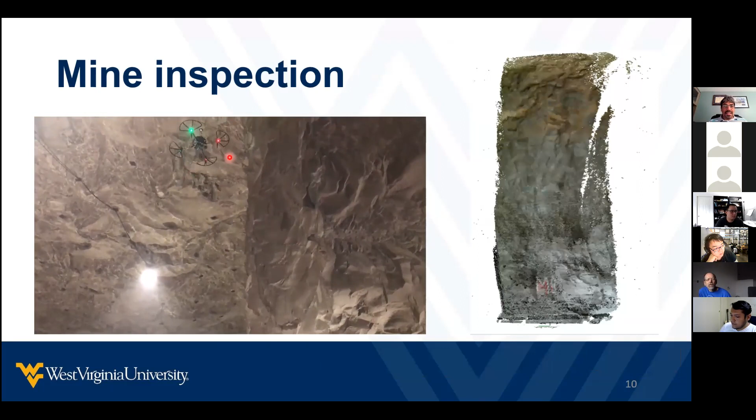My part of this project is the drone part, so we'll talk a bit about that. This is what we need to do, this is the pillar we have inside the mine. I hope you can see a video with the drone here. We are creating a map using LiDAR, and this kind of map is what we've gotten so far.

The idea is that we'll get these maps frequently, say once a year, and compare them to see if there are any problems with the pillars. That's the goal. The environment is indoor, so we cannot use GPS. We need to work on SLAM or other localization approaches for the drone. I'll show you some of the problems we'll have with this.

There is a question in the chat. Yeah, go ahead.

Typically I see LiDARs that are pretty large, too large to fit on a drone. So what LiDAR are you using? We are using an L515 LiDAR from Intel RealSense. It's a solid state LiDAR, very small, so it fits on the drone. The field of view is also small, so we need to move a lot to get a good map, but it is very light. That's the one we're using.

I see, sorry to interrupt. No problem, if you have questions just interrupt.

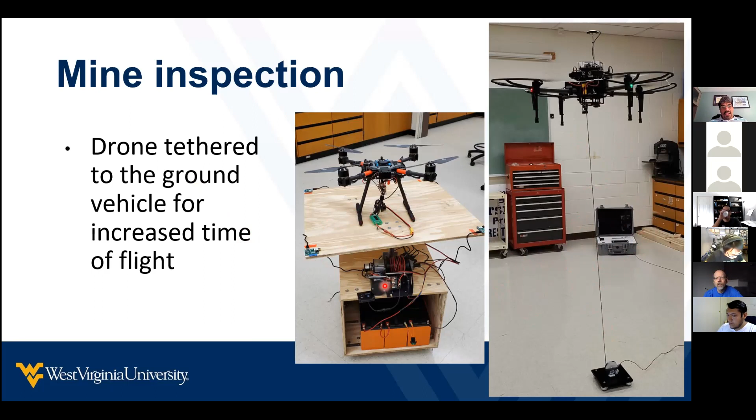Tethers are nice for powering, but tethers also present some problems. This is something you can see. If you don't take care of the tether, if you don't plan correctly the motion of a robot, you're going to have tangling. This video we just did with a ground robot shows this problem.

This robot is exploring the environment. You see it's creating a map here while it moves, and it's ignoring the tether. If you do that - this is Danilo, my student, helping the robot right now, because if you ignore the tether, simply you're going to have tangling. It's a problem. Although you have a map, at the end, the cable is wrapped around every obstacle.

So a solution that Danilo proposed - I have a picture of Danilo here - is to do motion planning, mapping, and exploration while being aware of the tether. If you do that, you can avoid tangling. In this video, he shows it's possible to do the same task without tangling around obstacles.

I'm going to just show how he does that. It's kind of simple, but you need to worry about it. Basically what he does is he keeps track of the tether configuration. So in a situation like this, for example, this is a robot, and they have an obstacle right here. He has an estimate of the tether.

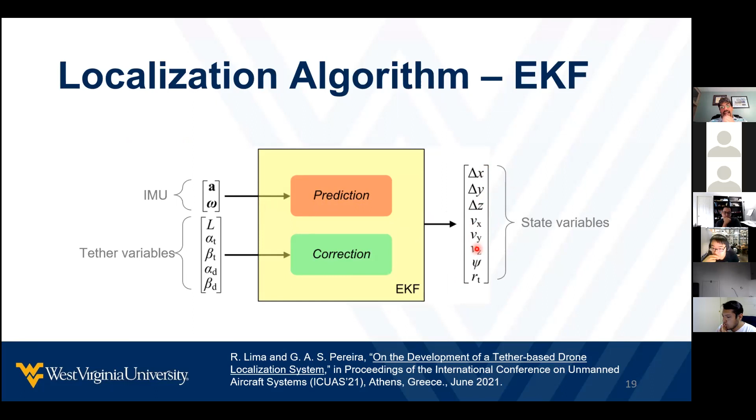So using EKF, for example, it's non-linear, so the measurement is non-linear, so I need an extended Kalman filter, and then we can estimate the position and the velocity of the drone. For us, it's very important to estimate the velocity as well, because we're gonna do landing on the platform using this kind of system.

This is a simulation. This was presented, it will be presented next week on ICUAS by my student, Rogério. And it's possible, right? We didn't test that yet in the real drone because the drone is not flying. We can localize the drone with not so bad error. We are planning to test that at the end of the summer.

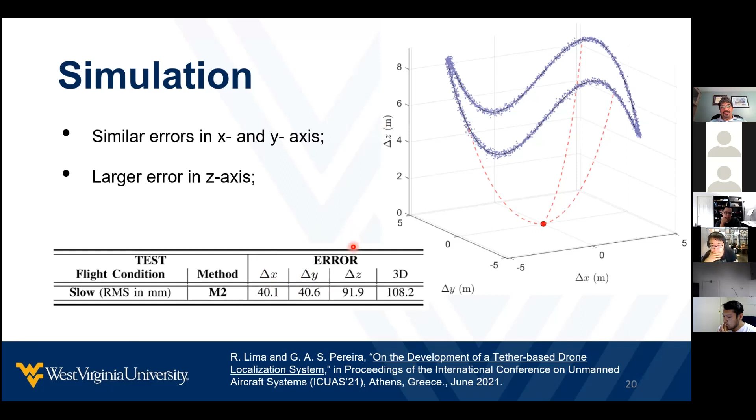Another thing we need to do, because remember that we have this ground vehicle and we have this drone that needs to land on the ground vehicle to move. So basically the ground vehicle, we're gonna carry the drone around, right? So we also develop some landing strategies.

So one of the landing strategies I'm showing in this video was proposed by Vinicius. Vinicius is my former student in Brazil. Now he's a fellow faculty over there as well.

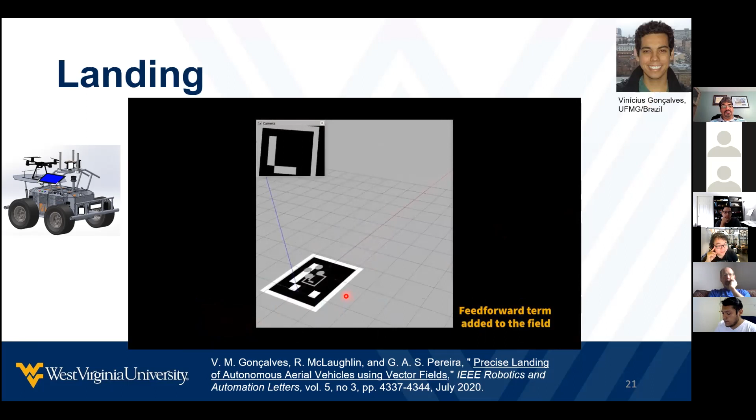We defined this method based on vector field to land, right? Right now in these videos, you're using vision to land, but the idea on the robot is that you're gonna have the tether for localization.

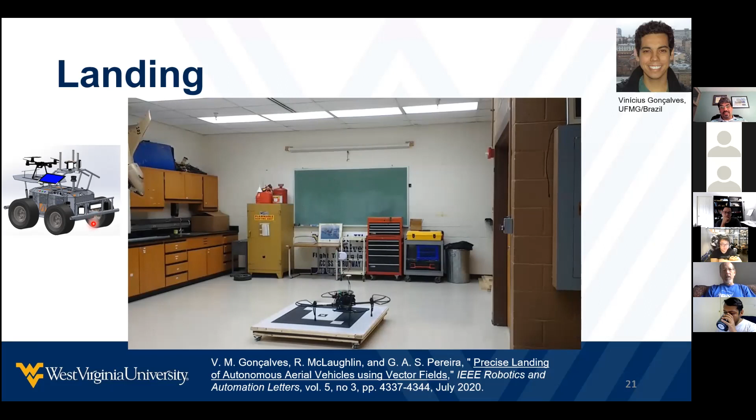We're also equipping the drone with UWB sensors. So if the tether doesn't work very well, we're gonna have a sensor fusion with UWB sensors, range sensors to avoid. But this is something that we did last year for that. So in this case, we have this camera, and the drone is detecting the marks using vision.

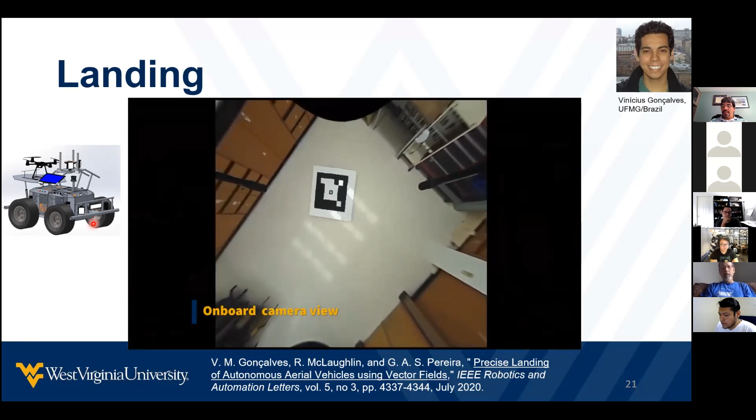Yeah, I think I'm gonna move a little bit faster here.

How it works, basically, we define the shape of the trajectory we want the drone to land, and then we define a vector field that converges the drone to this shape. We compare that with visual servoing.

Another question, let me respond. The tether is strong enough, perhaps it could guide the drone. Yes, we are planning to do that. We're also using the tether for keeping the drone on the ground vehicle while the assembly is moving, because the terrain in the mine is not very flat. So we need to keep the drone in place, and the tether can help. We are planning to use the tether to help the drone land.

So we define these vector fields. The good thing about the vector field approach is that independent of where you start, you're going to reach the goal. So basically, you're going to land.

We compared that with visual servoing and trajectory following. Visual servoing is very nice, but you cannot define the trajectory. It's very important for us to define the trajectory, because if you look at our robot, we have some obstacles on it, like lidars and other sensors. We need to avoid these, so we need to define a trajectory that avoids them.

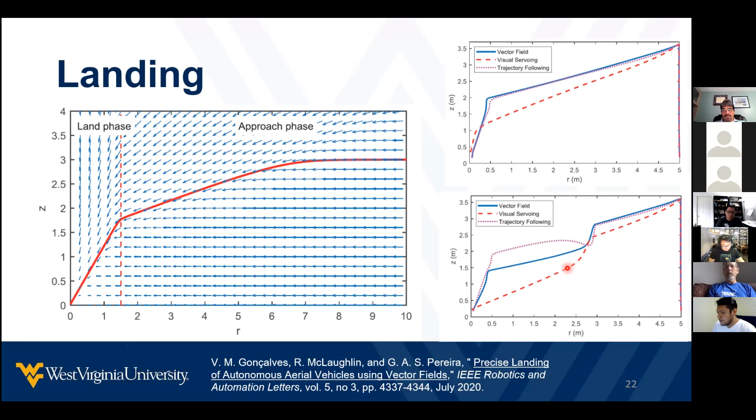Okay, next step for this project. We are currently developing a new drone. The drone we're using for the experiments is the M100 from DJI, but we cannot buy more, this drone is out of the market now, so we cannot buy another one. So I'm developing another one.

We're also planning to have a completely tethered, powered drone, so we don't have batteries on the drone. This way we can save some weight and put more sensors, for example.

We need to integrate localization and landing, and integrate this with the ground robot, then test a lot. The idea is to have a completely autonomous two-vehicle system, ground robot and drone working together, mapping the mine. This project finishes at the end of next year, so I think we have time to do all this.

Okay, the second thing I'm going to talk about is forestry. West Virginia has 81% of its territory covered by trees, so a lot of people work with trees. One problem we have is pest invasion.

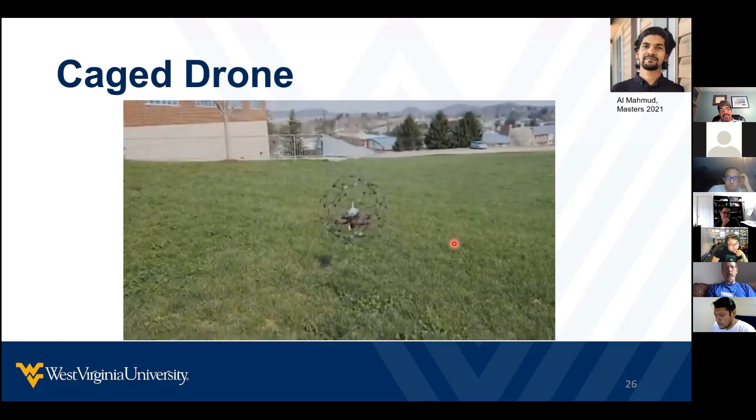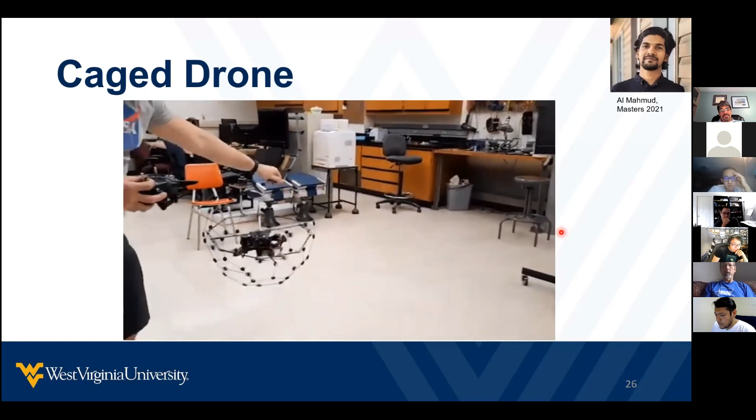Lots of collisions. So one thing my student Al Mahmud did, he just defended his thesis, was to create some caged drones. This is a drone that has a 3D gimbal inside, so you have a cage that can rotate around the drone. This is supposed to be resilient to collisions, so you can fly and, for example, collide, touch it, right? We have some commercial drones that do the same, but that was his master project to try to make something simpler and cheaper.

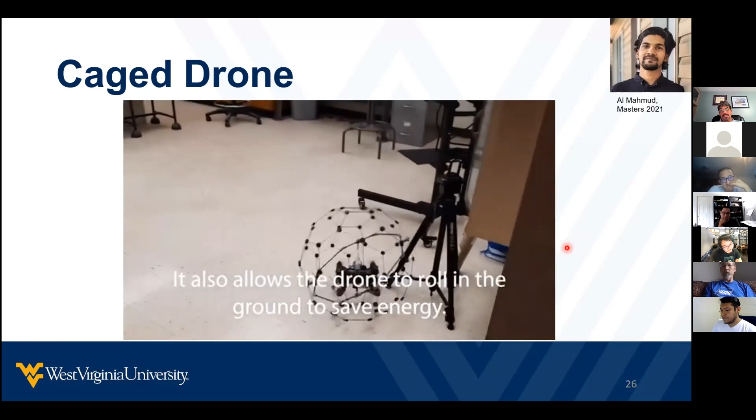So the cage is very nice. The drone can work as a ball, can rotate on the ground, and now we're trying to explore that stuff. The idea is I'm going to fly in the forest so I can collide with everything and still fly, right? So that's something we are researching right now. The problem is that this drone is kind of very hard to make. This gimbal system, and we need to save weight because the drone needs to fly, so it cannot be heavy. It's kind of very, very complicated.

So we propose some different cages. I don't know why it's not running, should be a video. Okay, let me play here. It's not playing, cannot play media. I don't know why. Yeah, but that's a different kind of drone.

A cage. So this doesn't have the gimbal, so it's much simpler to create. One thing about this drone is that when it falls, it always falls in the takeoff position. So the idea is to have a shape of the cage in a way you have this behavior. The drone is falling and then it goes to the takeoff position and then it can fly again. So this would be good for forests. Even if I collide and fall, I can take off again, right? So this is something I have some students working on.

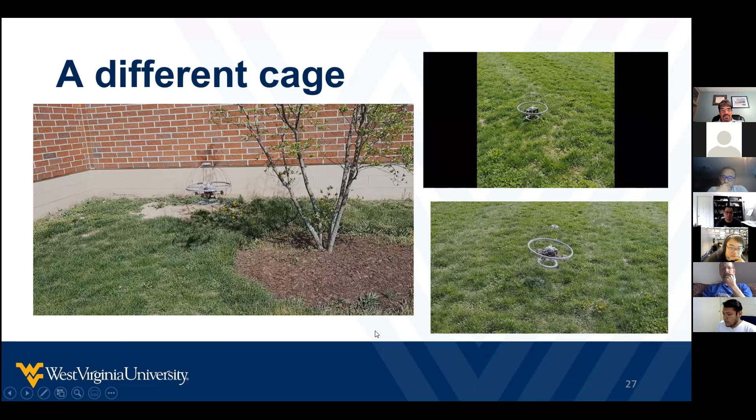So in spite of that, flying in the forest is hard. We have some problems with GPS, localization, things like that. But the big problem is that we don't have a map of the forest, so we need to avoid obstacles all the time. This is research I did in Brazil some years ago with those students, Antonio and Henrique, and we show here a drone flying and avoiding obstacles.

So basically this is carrying a LiDAR as well. This is a planar LiDAR, a Hokuyo, not as small as the Intel one, but it can detect some trees. You see it's following some trajectories here, detecting trees and avoiding them. I'm going to show you how we do this stuff.

Okay, so our solution is based on two planners. We have a global planner. The global planner, in our case, is a vector field, right? You see that we like vector fields. But what the global planner does is give the drone the main direction of movement. It doesn't know the obstacles, for example. It's impossible to know because the environment is dynamic, trees can have movement, you can have other stuff, right? We don't know the obstacles.

So the vector field is just saying the direction, okay, move in this direction, follow that curve, things like that. Then we have a second planner that we use as a local planner. This will be an optimal planner. That optimal planner has two goals: one is avoid obstacles and no-fly zones, and the other is to follow the vector field. So basically, I have a planner to follow the vector field here, but that will create paths that are free of collisions. Then this planner is going to send trajectories to a trajectory control.

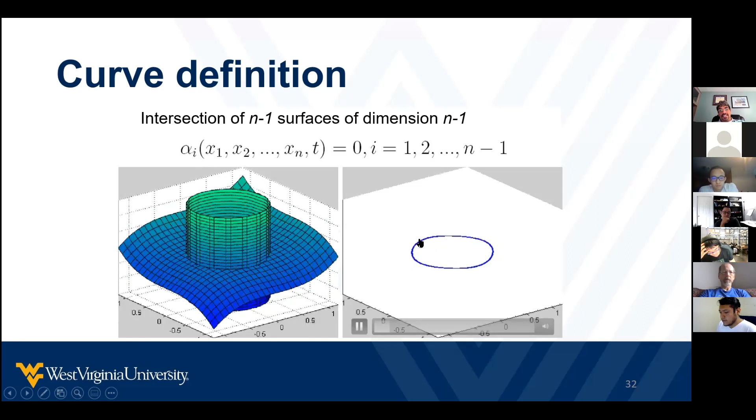So now we're going to define a vector field for this curve. Let's call each of these surfaces alpha. In this case, we have alpha 1 and alpha 2, two surfaces. In 3D, we need two surfaces, and then we define this curve here in 3D.

So the vector field is very simple. Basically, we have two components. One component solves the convergence to the curve, so we create a vector that's orthogonal to the curve. And then we have another vector field that's tangent to the curve, which creates circulation around the curve.

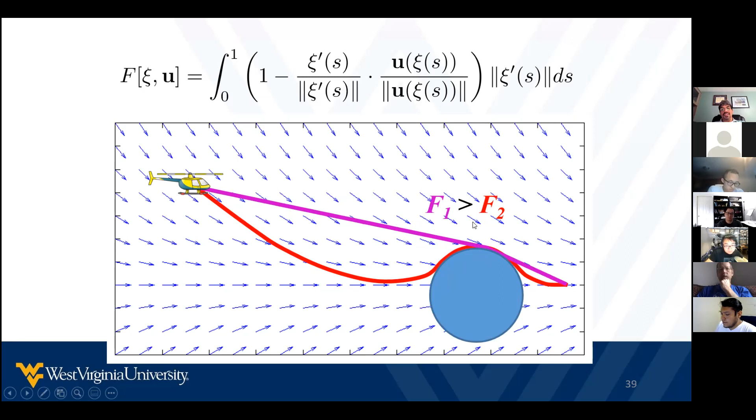So basically with this functional, we guarantee if you minimize it, the trajectory will follow the vector field. When you have obstacles, you have similar things. Here you see the pink trajectory is shorter than the red one, but the red one follows the vector field and avoids obstacles. Both avoid obstacles, of course, because in motion planning the goal is to avoid obstacles.

So how do we solve this optimization problem? We solve using RRT star. RRT star is an asymptotically optimal motion planner, so basically it finds the optimal trajectory given a functional, and in that case we're using that functional.

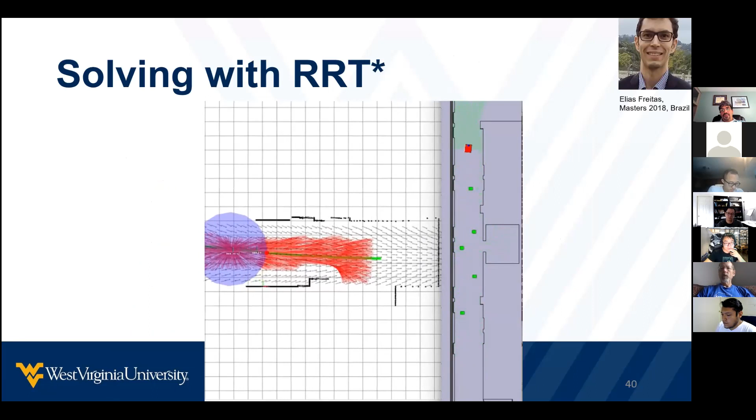So you see here a robot following a corridor and avoiding obstacles. This is work of my former master student in Brazil, Elias. And we also use that for the drone, so basically you're solving RRT star on the drone as well.

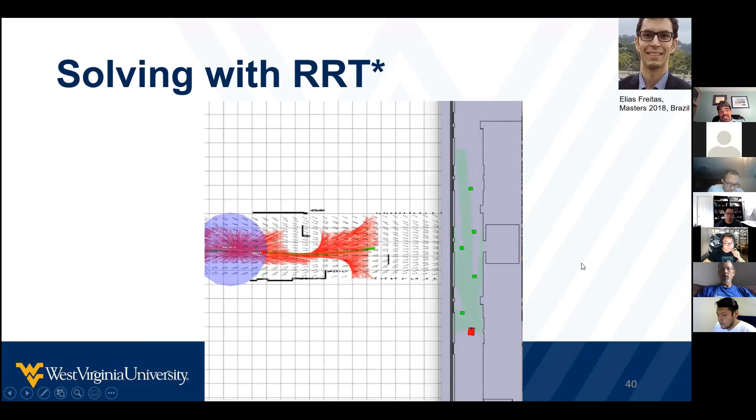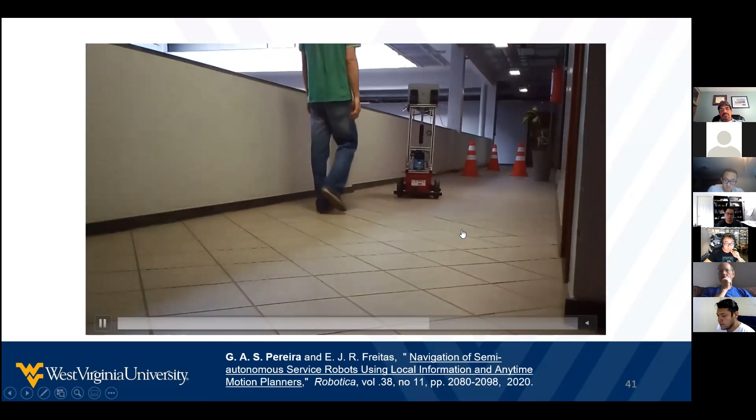I'm going to show you a video of this. This is Elias' video on a ground robot following this strategy. So it doesn't know the position of the cones, for example, and it's basically following a vector field moving straight in the corridor. It doesn't know the person either, and avoids that person just using this strategy. So it's following the vector field and avoiding obstacles.

Have you thought about informed RRT? Yeah, of course, we tried other stuff. Informed RRT star is not applicable to this problem because actually we don't know the goal at the beginning. And we are using RRT star in anytime mode - that's why we can choose the sampling time, so we can have 1 second, 1.5 seconds, 2 seconds. Of course, if we have more time, we can have better trajectories.

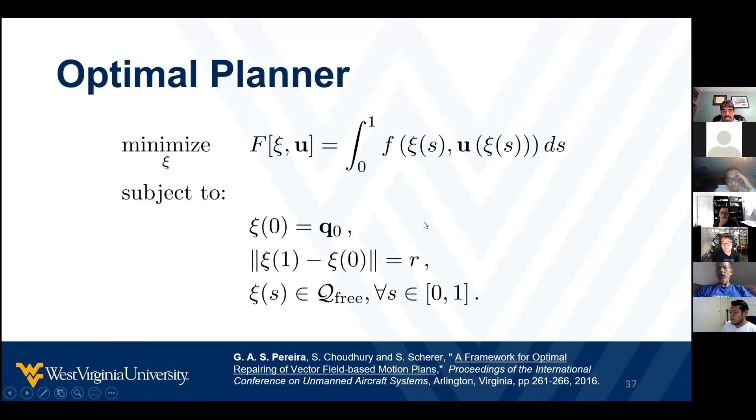Can you reuse RRT star? Yes, I can reuse RRT star. But I'm not doing that right now. But yes, that's something that...

So I think you guys understood - we need to do it fast, because if I plan fast, I can move fast. Right now I'm using 1.5 seconds on the forest. I think on the ground robot it's 1 second to plan, using the anytime properties of RRT star, yes.

But then I have this student, Bernardo, who proposed something different - instead of using RRT star, maybe we have something that's faster. The idea is: why isn't RRT star as fast? Because it needs to compute collision all the time, so checking collision is very slow. Usually checking collision is about 99% of the time that we spend.

So the idea of Bernardo's is, instead of creating the nodes in real time, you create the nodes offline. You create a lattice like that, so the nodes are no longer random - you have fixed nodes in a lattice. And since the nodes are fixed, we can have a sensor-to-graph mapping. So for each beam of the LiDAR sensor, we know the nodes related to that beam - at least the edges we know.

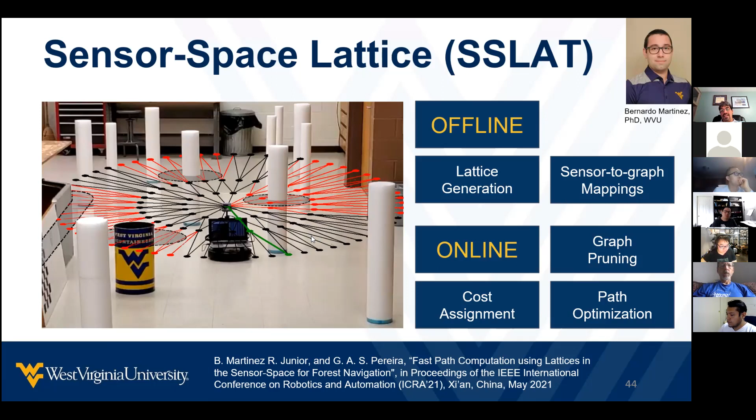This seems similar to the notion of motion primitives. The difference here is that we have this mapping between sensor and edges. So yes, we have the primitives, it's kind of that. We have all the motions possible, but we know how to remove those motions very fast. Yeah, this is similar to motion primitives for sure.

Thanks for observing that. So he has this approach where it's parametric, so you can choose the number of layers, trunks, and branches. Usually it's much more dense than that, the graph is much more dense. But the idea is that for each point in the space, you may have more than one node on the graph. So usually we draw this in 3D because for some positions we can have two nodes. So you have several trees coming from the root.

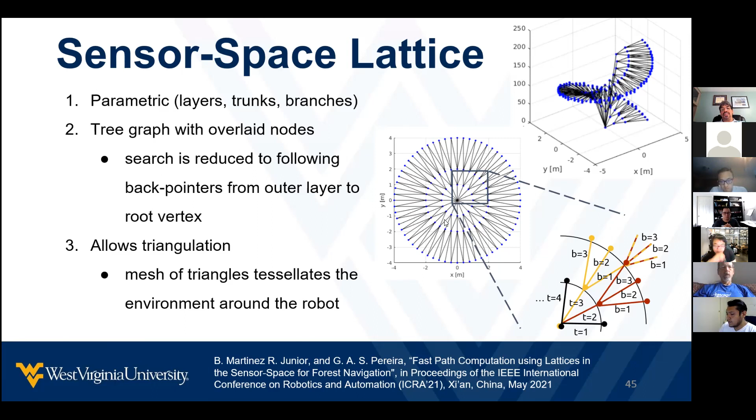And another thing, because this looks like we have straight edges here, it looks like we have a lot of triangles. So he creates a mesh of triangles, and then he can prune the edges by detecting collision between the laser beams and the triangles. What he does in real time is use these mappings, basically lookup tables: triangles to edges, and another lookup table, laser beams to triangles.

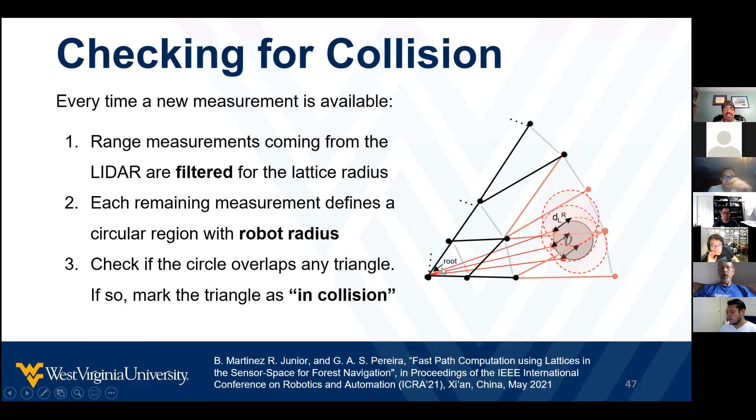So in real time, he just checks if a laser beam has an obstacle. If it has an obstacle, I know the triangles related to that collision, and then I know the edges automatically. So this is very fast. He checks collisions, and increases the size of the beams a little bit to account for the size of the robot, so it's very easy to check collision. Also, because we have a fixed number of edges, laser beams, and triangles, you can do everything in parallel, which makes it even faster. He has an implementation on CUDA, and this is really, really fast.

Does it take into account dynamic obstacles? No, it doesn't take into account dynamic obstacles, but because we are doing this really fast, in less than 10 milliseconds, we can usually avoid dynamic obstacles. Even if you consider the dynamic obstacle as static, since you're computing very fast, if it's not extremely fast you can avoid it. That's the idea of moving fast, of computing this fast. Of course, maybe you cannot avoid it because the robot dynamics aren't enough, but at least the path will avoid some dynamic obstacle.

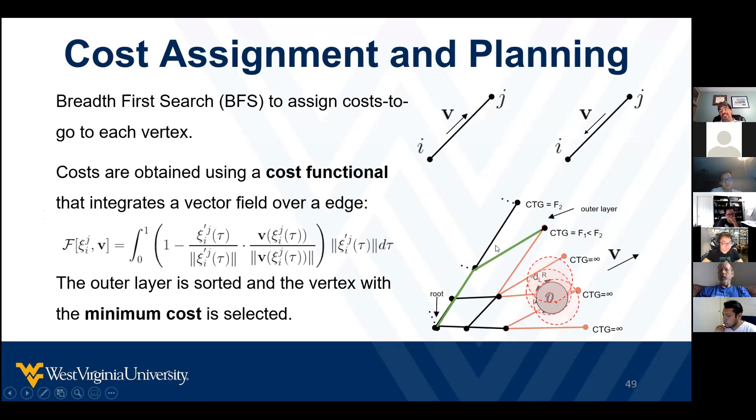The trajectory will avoid it, if the robot will avoid it, I don't know. Okay, so after we prune the graph, we do a simple BFS very fast to do cost assignment. Then we find the leaf of the graph with the smallest cost, and that will be our goal. Automatically we just follow the back points and get the path. Of course the path is not very smooth, but it's very close to the optimal path, and it's much faster than RRT-type approaches.

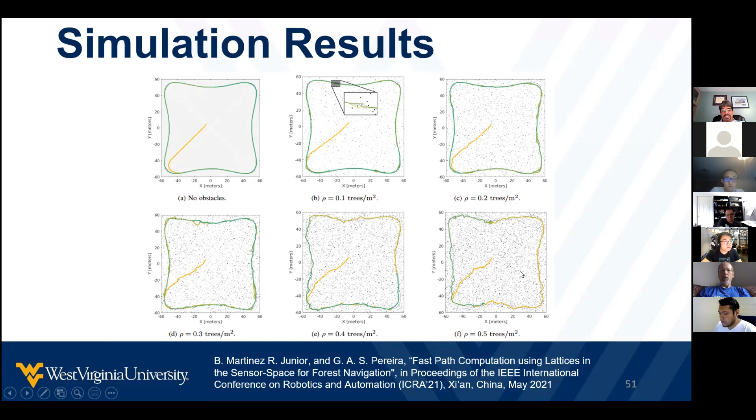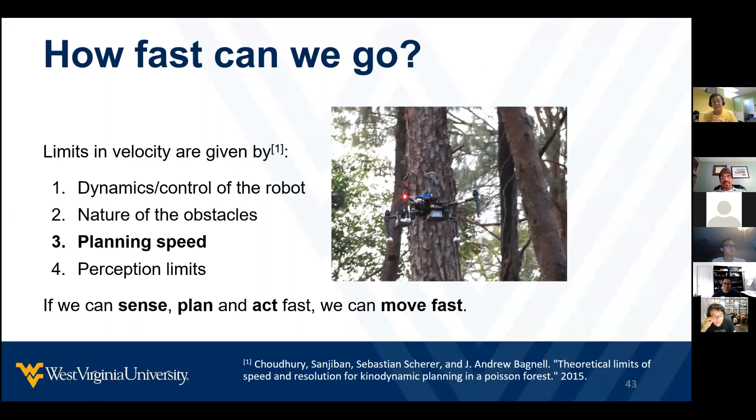So I also have two other questions. The first one is about using the tether to solve the tether problem with obstacles.

Since we are doing SLAM with drones in an unknown environment, what will happen if we do not know the existence of the obstacle? For example, if we tangle with an obstacle that we don't know exists. Do you consider that situation?

Yeah, basically we are doing that right now in these 2D problems. So we don't know the obstacles, we are doing exploration. So if you don't know the obstacle, you just assume you can go straight.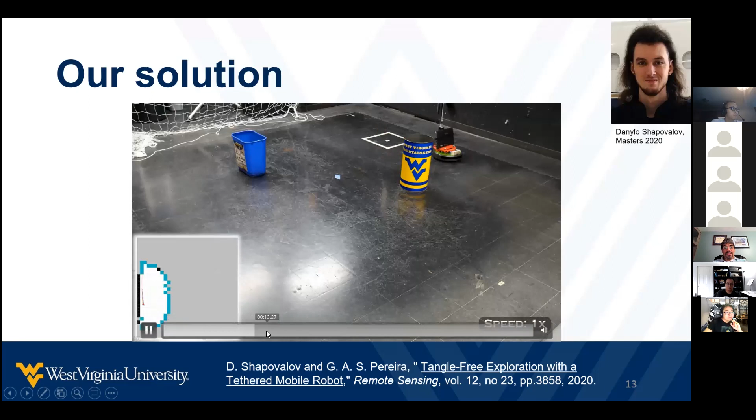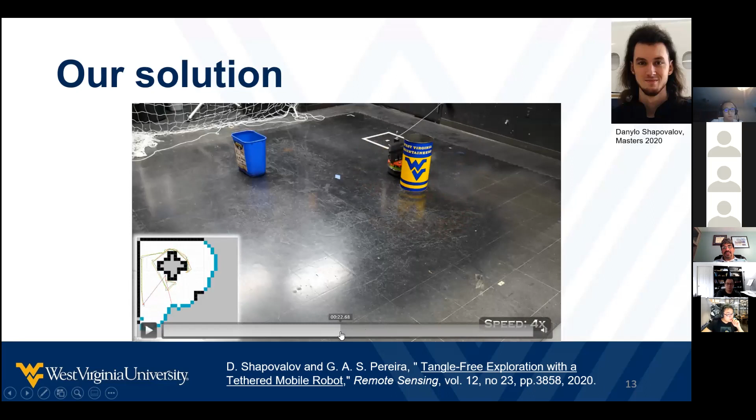Actually, the algorithm doesn't consider anything about the dynamics of the tether. So we have friction, you're right, between the obstacle and the tether. We're not considering it explicitly, but we notice that with our algorithm we have less friction. You see here in this video, because you're always trying to avoid this, so you have friction here, but then it gives up and goes back, right? So you have some friction, but we don't need to consider it basically.

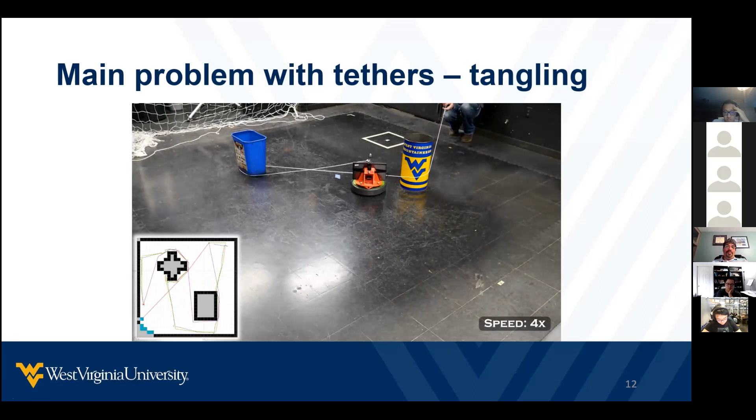At least in our experiments we didn't see any problem with that, but that could be good to investigate in the future. If you look at the other solution without the algorithm, where you ignore the tether, see what you have. In this case friction is a big problem, see? That's why you see Danylo running here sometimes to help the robot, because if you don't help the robot, friction will prevent it from pushing the tether. So basically, by avoiding tangling, you also help in this matter.

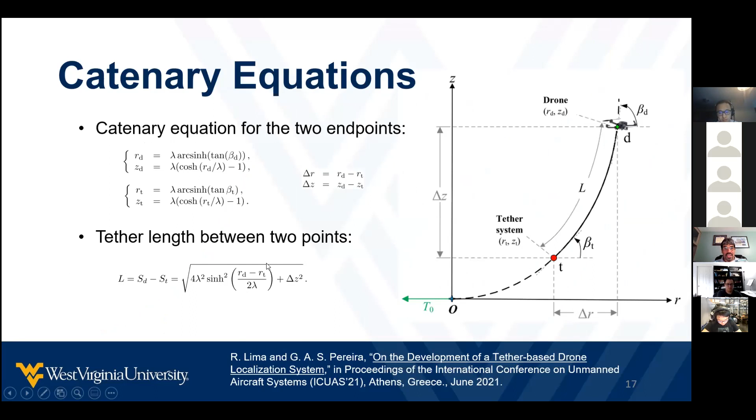The other question was on the drone problem—are we considering the mass? We're not considering the mass explicitly, but we have a sensor that measures the tension, so indirectly we are considering the mass. We don't need to consider that in our equations because the tension will take care of it as well. Tension is basically the force, and mass is being considered in this force. But thank you for the questions.

Do you want to continue, Mingu? Yes. Hi, Professor. They are very practical projects and very impressive, and I just have two primary problems.

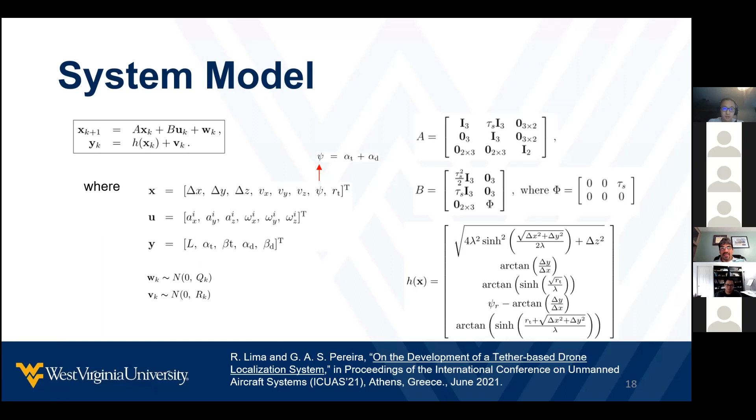For mine exploration, it seems that the cave has enough space, like we can allow the drone to fly. So what's the benefit compared with human beings? It seems that we can drive directly into the cave, so in this situation... Oh yeah, so that's a problem. I should have some other pictures here.

This mine is huge, right? It covers an area larger than our city here. It's underground and large, so you could have people, but that would take a long time to do all this. So the idea is to do some automation. Also, some parts of the mine are not being used anymore—the old part is kind of dangerous for people to go there, you could have rocks around. So the idea is to make it safer and faster.

I see, yeah, you're right, it's a lot of space so we could fly. This is kind of high—some parts of the mine are like 15 meters high as well. It's very boring for a person to fly this drone over there and do all this, so that's why we want to automate it.

So the sponsor wants to automate—this is a foundation actually in Pennsylvania, and this mine is also in Pennsylvania. We are like 15 minutes from Pennsylvania here. So all this is in Pennsylvania, but they want to automate it because it's very dangerous if you don't look at the pillars, and it's also very boring to do.